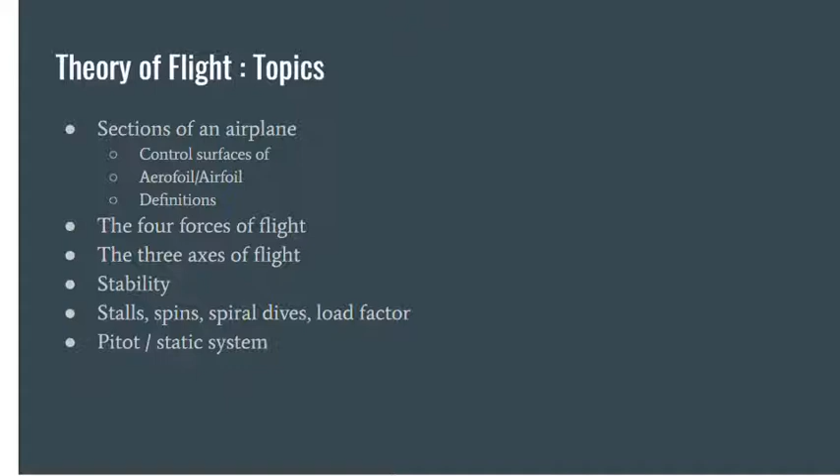So aeroplane is a power driven, heavier than air aircraft deriving its lift in flight from aerodynamic reactions on surfaces that remain fixed under given conditions of flight. So ang ikaduha is aircraft. So any machine that is capable of deriving support in the atmosphere from reactions with the air.

So inote lang ninyo nga ang aeroplane is an aircraft, but an aircraft is not always an aeroplane. Then other aircraft, so airship, helicopter, balloon, glider, or ultralight, blimps. So aircraft pud na siya.

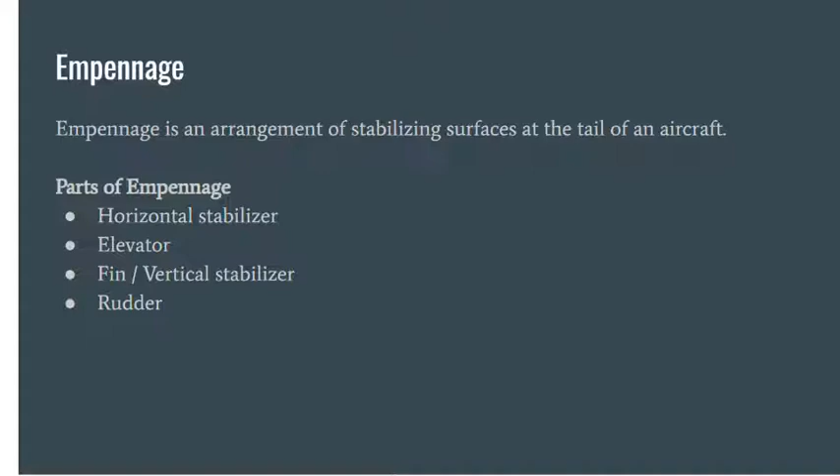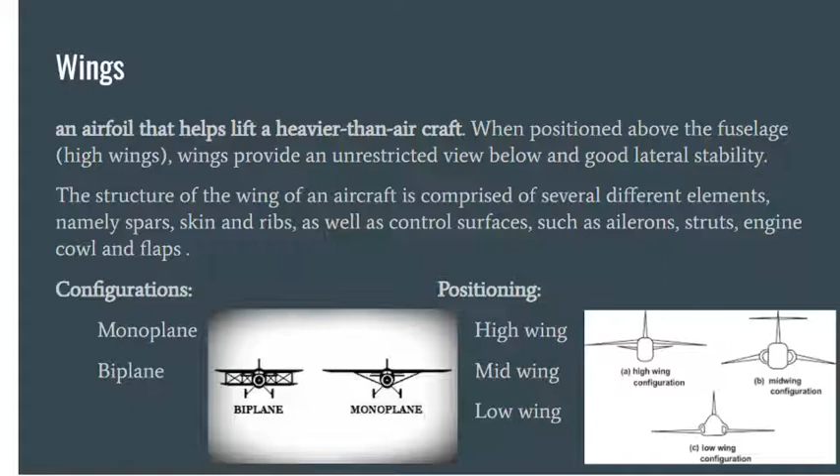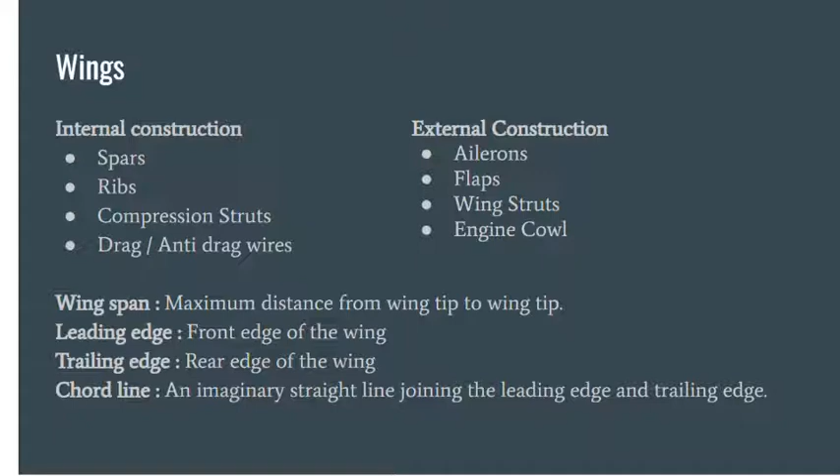Then external construction is kaning ailerons, flaps, wing struts, engine cowl. So kaning engine cowl mao ni cover sa engine ni more sa power plant. Then wingspan is maximum distance from wing tip to wing tip. Then ang leading edge kay naa siya sa front of the wing. Kung facing ka sa aeroplano or facing ka sa nose area sa aeroplano, imo makita ang iyang pinaka front sa wings, tawag ana is leading edge. Then ang trailing edge is ang nasa likod or ang rear edge of the wing. Then chord line is an imaginary straight line joining the leading edge and trailing edge.

The next, airfoil. So airfoil is a structure with curved surfaces designed to give the most favorable ratio of lift to drag in flight. Then it is used also as the basic form of the wings, fins, and horizontal stabilizer of most aircraft. So kaning airfoil, naa pod ni siya many different types of designs, each of specific purpose. Basically, aircraft designed for slow speeds will have a thick wing. Then ang thin wing is best for high speed. So nakakita ba mo jet plane? So nipis man iyang wing surfaces or iyang airfoil. So mao to, paspas kayo ni. So kanang nipis.

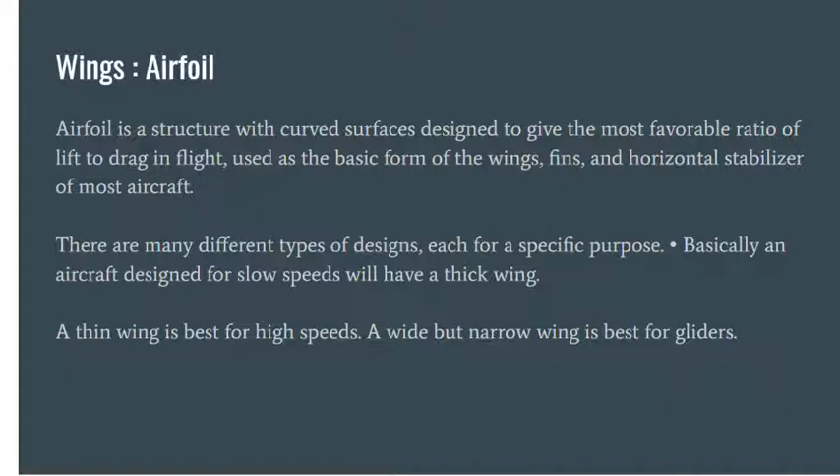Then next, so naay duha ka types of airfoil. So mao ni ang conventional and laminar flow. So sa conventional, thick iyang structure and lower weight for better stall. So characteristic ani niya. And the thickest part is at 25% sa chord. So from 25%, padung dire sa trailing edge niya. So 25% ana is mao ni thickest part niya. Then plus 25 pa ana, so ma 50% is mao lang gyapon ni ang iyahang thickest part niya. Ang pinaka last nga 25% is padung na trailing edge. So panipis na padung sa iyang trailing edge.

Dayon ang laminar flow is usually thin. So originally designed to fly faster. So the leading edge ani is more pointed and its lower and upper surfaces are nearly symmetrical. So ang thickest part ani is naa siya sa center or sa 50% nga chord.

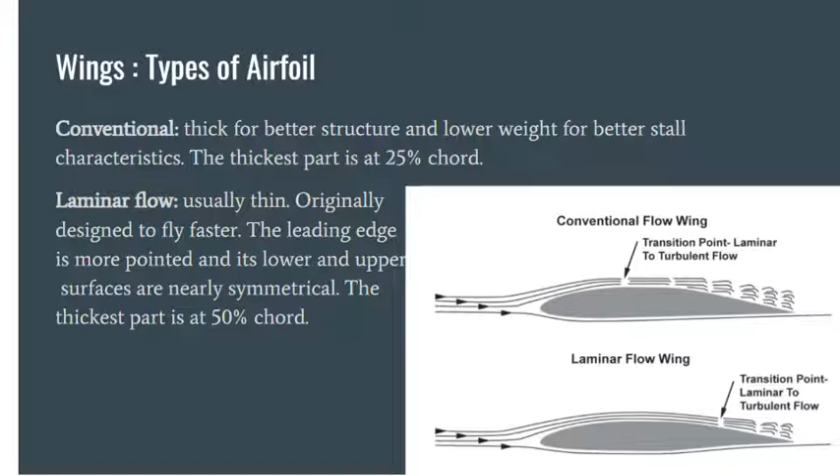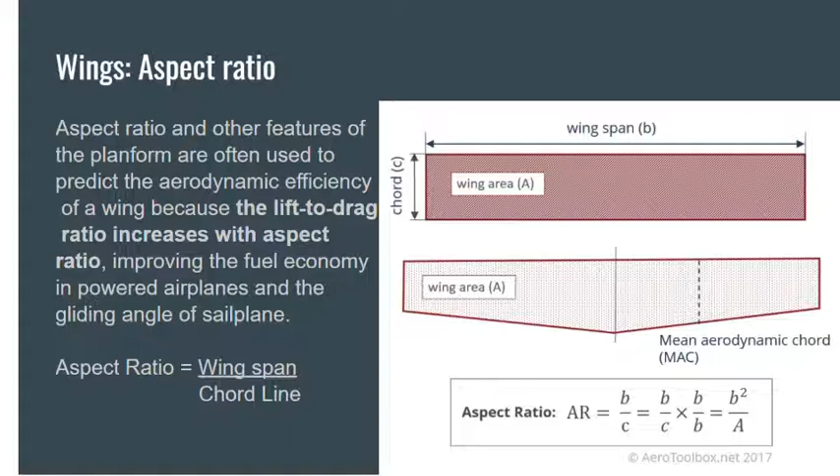Wingspan. So wingspan is the maximum extent across the wings. So mao to wingtip to wingtip. So mao nang wingspan. Then chord line, leading edge to trailing edge. So the imaginary straight line joining the leading edge and trailing edge of an airfoil.

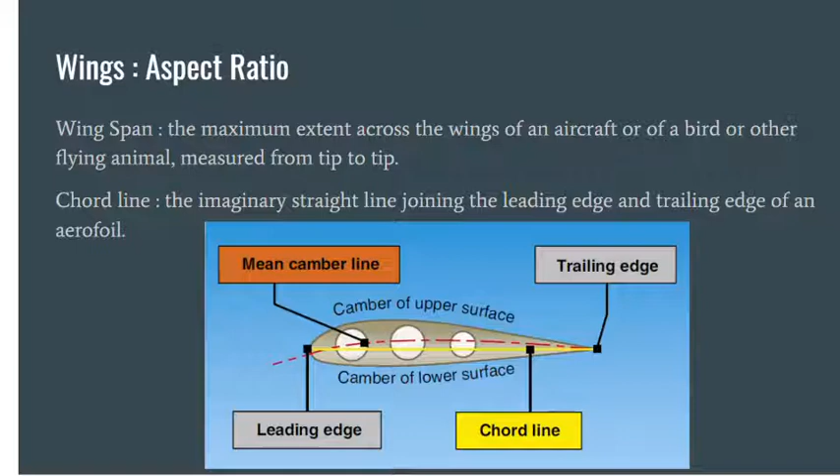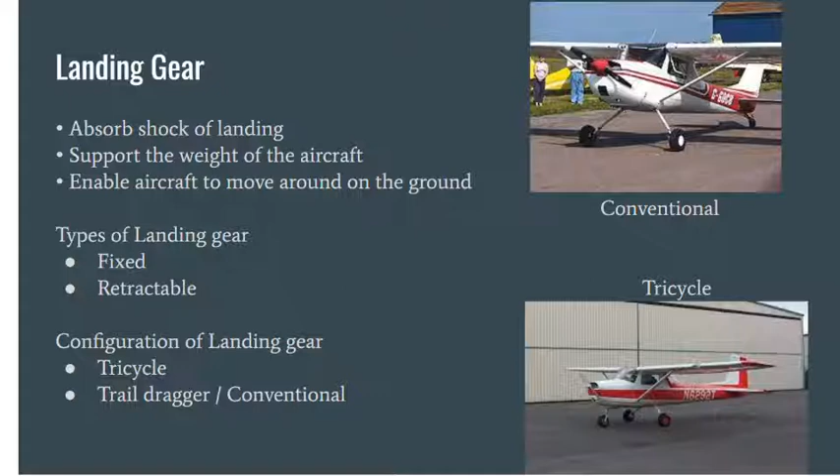Then configuration sa landing gear. So mao ni ang tricycle type and conventional or tail dragger. So as you can see sa illustration, ang conventional is duha iyang main pero nasa likod or sa tail section iyang isa ka wheel. Then sa tricycle type is nasa power plant or sa nose area iyang isa ka wheel, then duha pud sa main landing gear or sa likod ana niya.

The next, power plant or propulsion system. So sa power plant, in simple terms, an aircraft power plant is an engine. It is made up of many components such as cylinders, pistons, and fans, which help to produce the energy needed to propel an aircraft. Then the power plant may be a jet engine or combination of propellers and engine.

Additionally, there are numerous types of engines for the variety of aircraft, such as helicopters or commercial jets, commercial aircraft. Jet engines are typically one of the more common types of aircraft power plant.

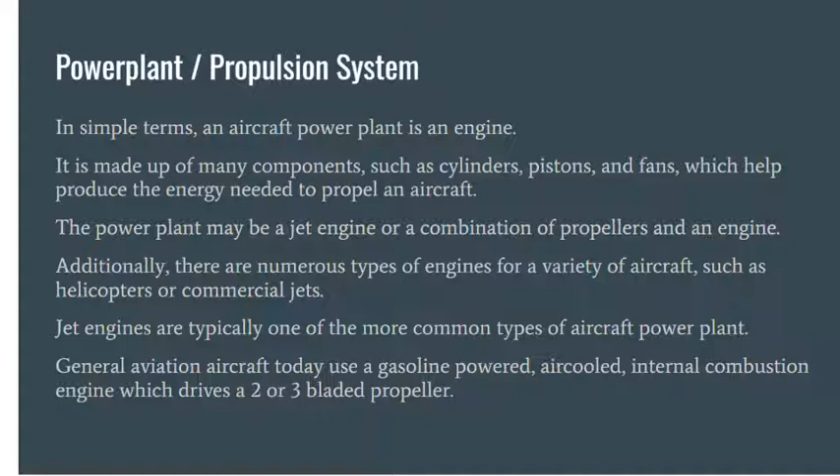Then general aviation aircraft today use gasoline. So general aviation, what they use is Beechcraft. So usually they use gasoline powered, or their fuel is called avgas, which is an air cooled internal combustion engine which drives a 2 or 3 bladed propeller.

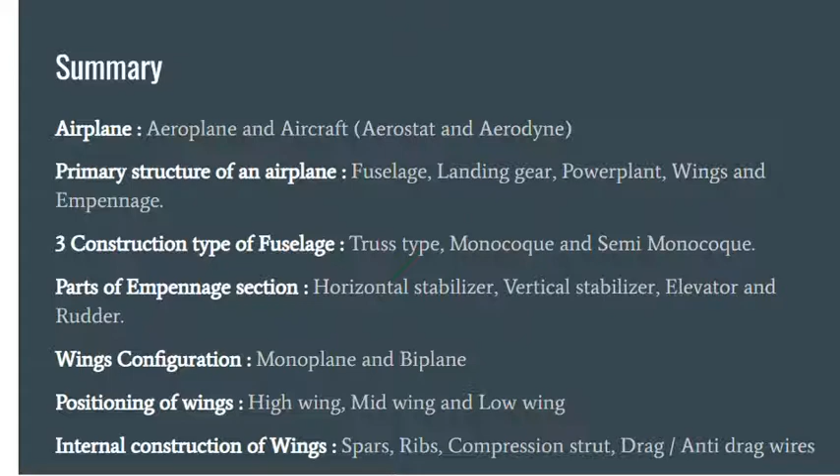Main parts: spars, ribs, compression strut, drag or anti-drag wires. Then external construction of the wings: ailerons, flaps, wing struts, and engine cowl. Then types of wing airfoil, there are two types: conventional and laminar flow. Aspect ratio is wingspan divided by the average chord line. Then types of landing gear: fixed and retractable landing gear.

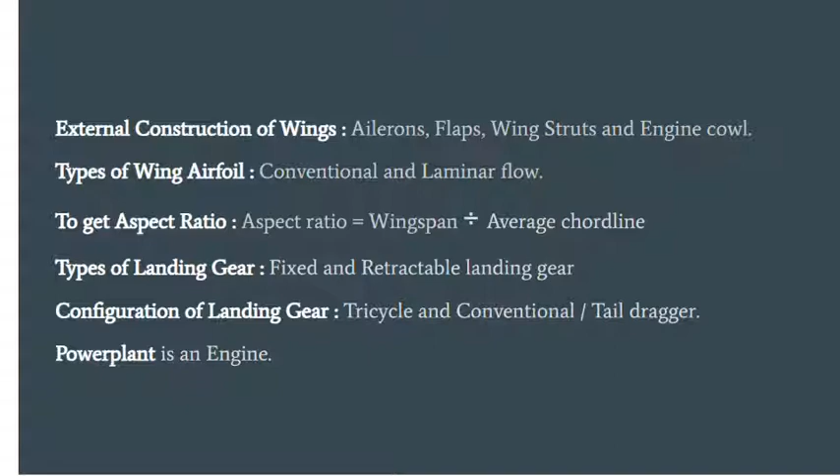Next, there are 4 forces acting on the aircraft: thrust, drag, lift, and weight. Understanding how these forces work and knowing how to control them with the use of power and flight controls are essential to flight. Thrust is the forward force produced by the power plant or propeller. It opposes or overcomes the force of drag. Drag is the rearward retarding force caused by the disruption of airflow by the wing, rotor, fuselage, or any protruding objects.

Then lift is a force produced by the dynamic effect of the air acting on the airfoil and acts perpendicular to the flight path through the center of lift and perpendicular to the lateral axis. In level flight, lift opposes the downward force, which we call weight. As you can see in the illustration.

And last is weight. Weight is the combined load of the aircraft itself, the crew, the fuel, and the cargo or baggage carried on the airplane. Weight is a force that pulls the aircraft downward because of gravity. It opposes lift and acts vertically downward through the aircraft center of gravity.

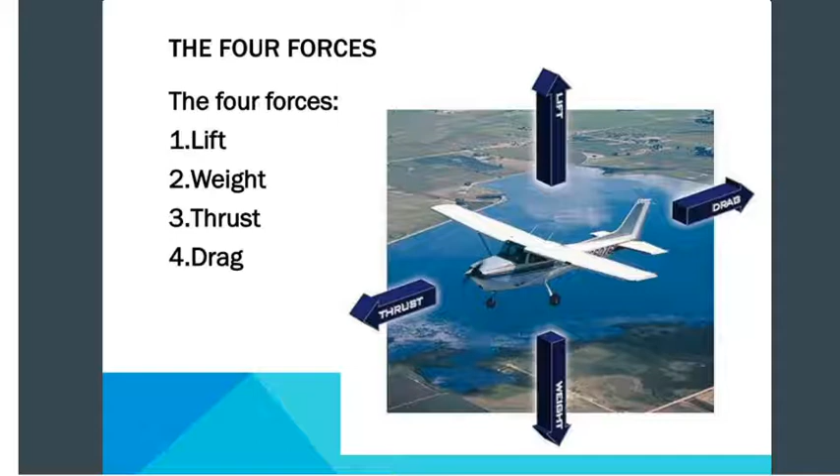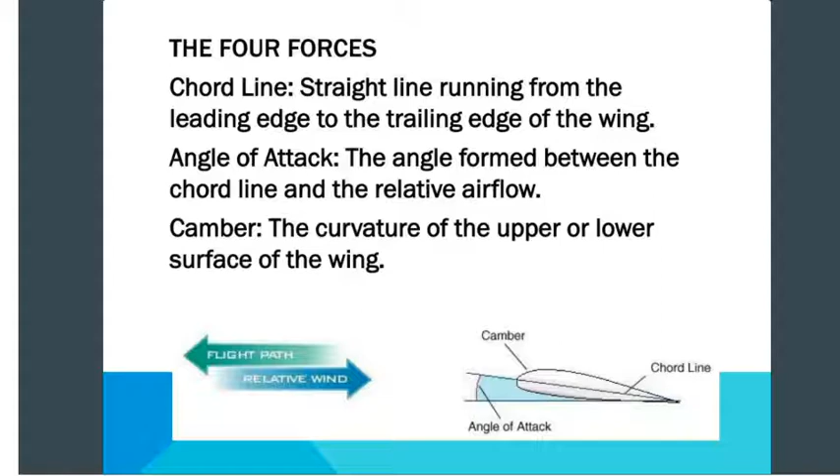Next is camber. Camber is the curvature of the upper or lower surface of the wing. In the middle of the camber is the imaginary chord line from the leading edge to the trailing edge of the wing. Next is angle of attack, which is formed between the chord line and the relative airflow.

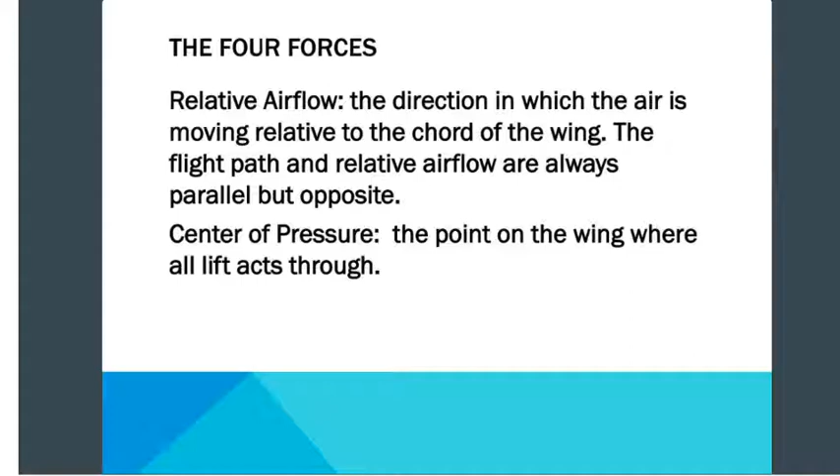Next, relative airflow. Relative airflow is the direction in which the air is moving relative to the chord of the wing. The flight path and relative airflow are always parallel but opposite. Center of pressure is the point on the wing where all lift acts through. Next, laminar airflow. This is the smooth streamlined airflow over the wing.

It is also defined as the airflow within a designated space that is uniform in both velocity and direction. So if you ride an airplane, the flight is smooth when it experiences laminar airflow.

Then turbulent airflow. This is an airflow over the wing which is no longer smooth but has become chaotic. If you've been on a commercial aircraft, you may experience this, or have heard the term turbulence, occurring mid-air.

When this turbulent airflow occurs, it feels like driving on a rough road, similar to riding in a vehicle. Then, transition point. This is the point where laminar airflow changes to turbulent airflow, for example above 10,000 feet sea level where the flight is usually smooth, then suddenly turbulence occurs, like passing through clouds, transitioning suddenly from smooth to chaotic flight experience.

Then boundary layer. This is the very thin layer of air that sticks to the wings due to skin friction. This layer of air consists of both laminar and turbulent airflow.

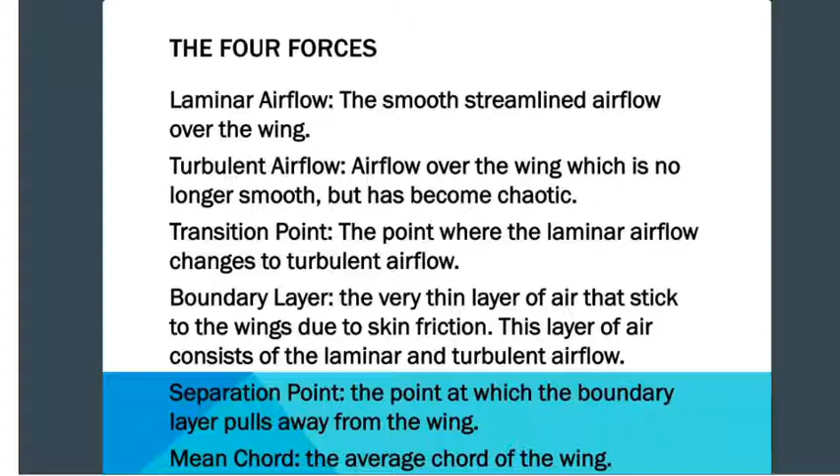Next, angle of incidence. Angle of incidence is the angle at which the wing is permanently inclined to the longitudinal axis.

Wash in, wash out is wings that are slightly twisted, causing the wing root to have a higher angle of attack.

Then spoilers and dive brakes. These devices are fitted into the wing to increase drag and decrease lift. Spoilers are on top, dive brakes are on the bottom. This is similar to a thrust reverser that you can find on a commercial aircraft.

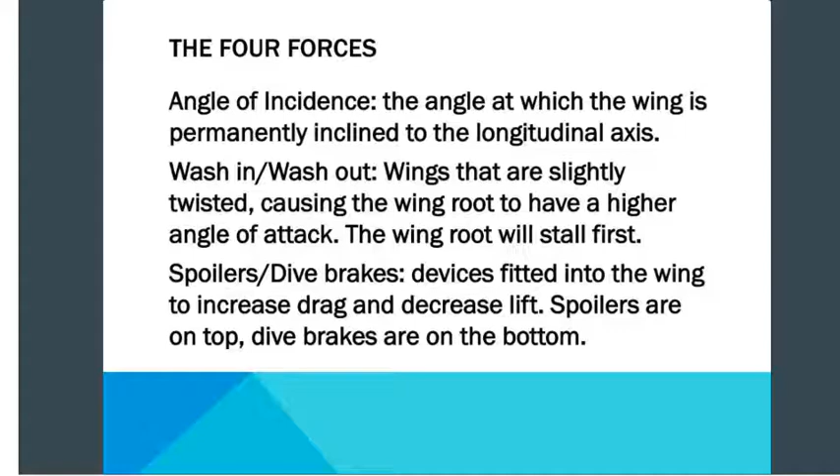Next, wing fences, fin like surfaces on the upper part of the wing to control airflow, providing better slow speed handling and stall characteristics.

Slats. Slats are auxiliary aerofoils fitted to the leading edge of the wing to improve lateral control. Slats pull out from the wing at high angles of attack, pushing the turbulent airflow farther back.

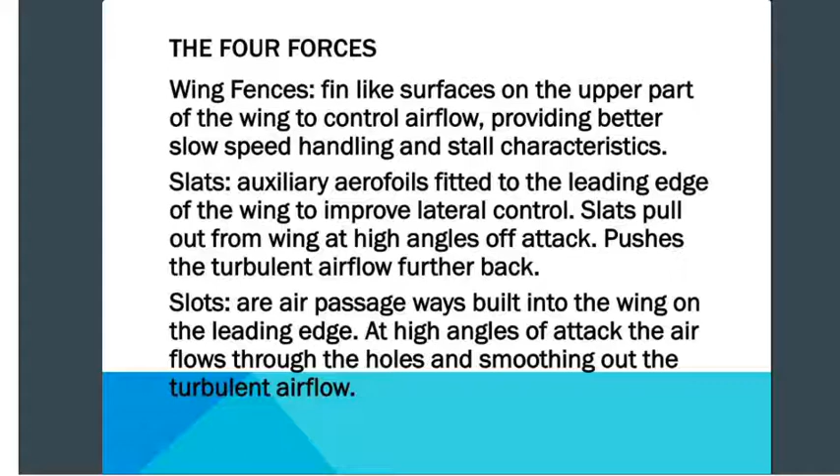Then slots are air passageways built into the wing on the leading edge. At high angles of attack, air flows through the holes, smoothing out the turbulent airflow.

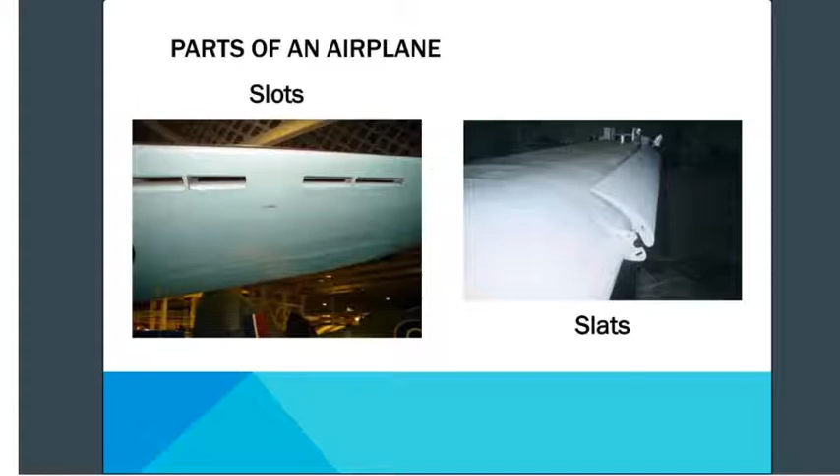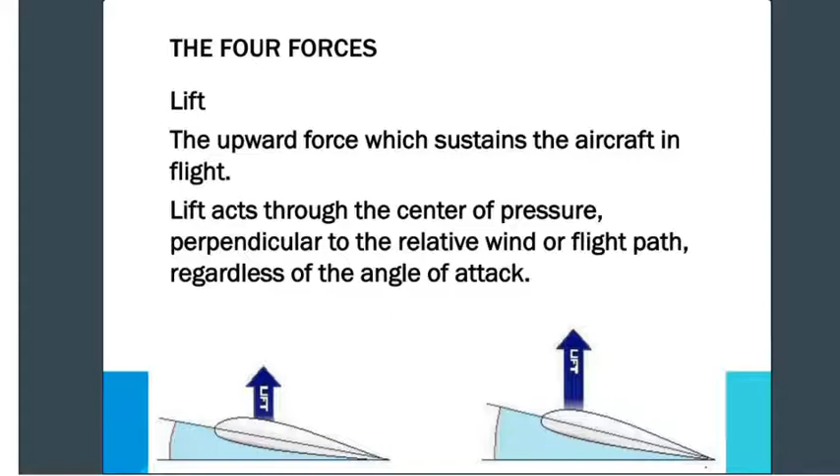Next, lift. Lift is the upward force that sustains the aircraft in flight. Lift acts through the center of pressure, perpendicular to the relative wind or flight path, regardless of the angle of attack.

Then there is lift related to Newton's three laws of motion. Number one: an object in motion tends to remain in motion. Second: an external force must be applied to alter the state of motion. And third: for every action there is an equal but opposite reaction.

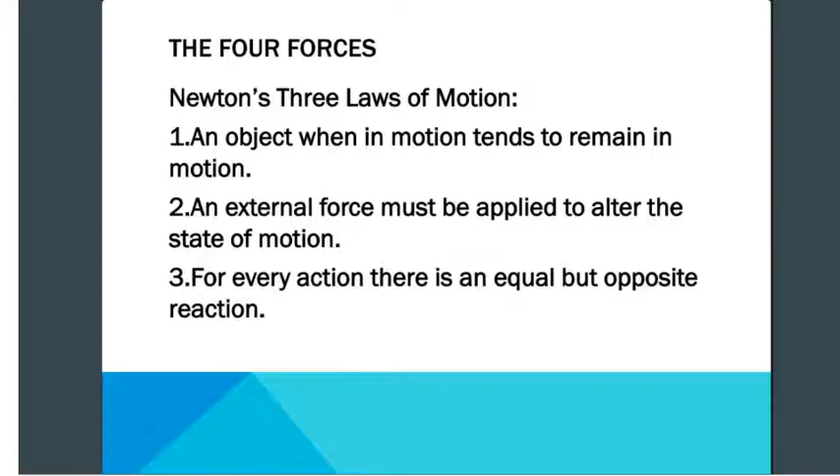Then Bernoulli's principle: the total energy in a system remains constant. If one element increases, the other element must decrease to counterbalance it.

Air flowing over the upper surface of the wing accelerates to catch up with the air flowing under the wing. As the air speeds up, the pressure decreases, and on the bottom of the wing, the pressure increases.

The differential in pressure between the upper and lower surfaces of the wing is what causes the upward force. This is what is called lift.

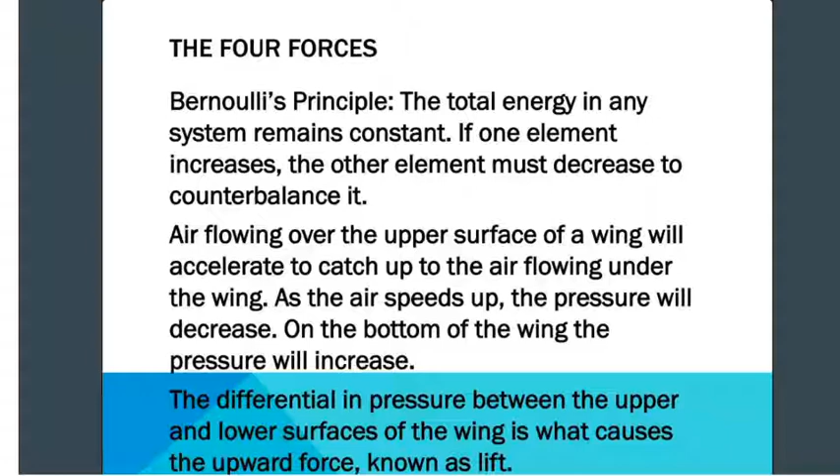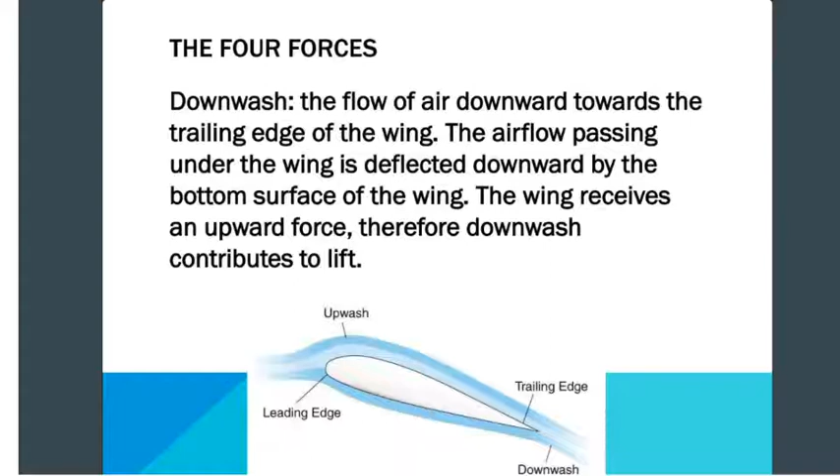Next, downwash. Downwash is the flow of air downward towards the trailing edge of the wing. The airflow passing under the wing is deflected downward by the bottom surface of the wing, so the wing receives an upward force. Therefore, downwash contributes to lift.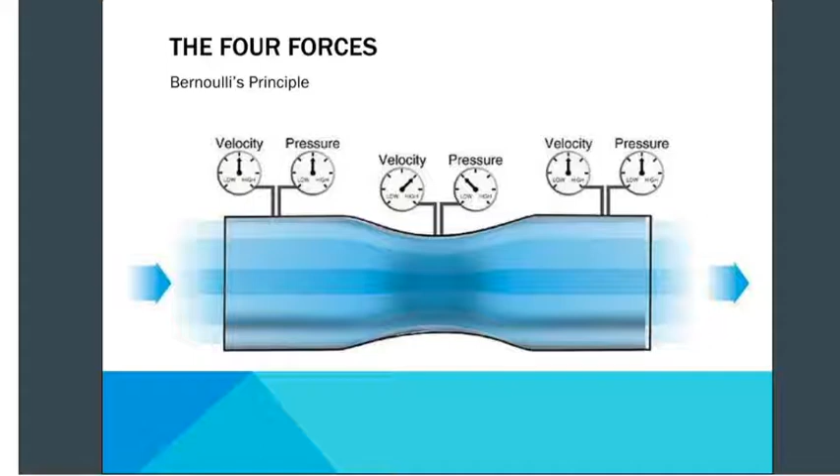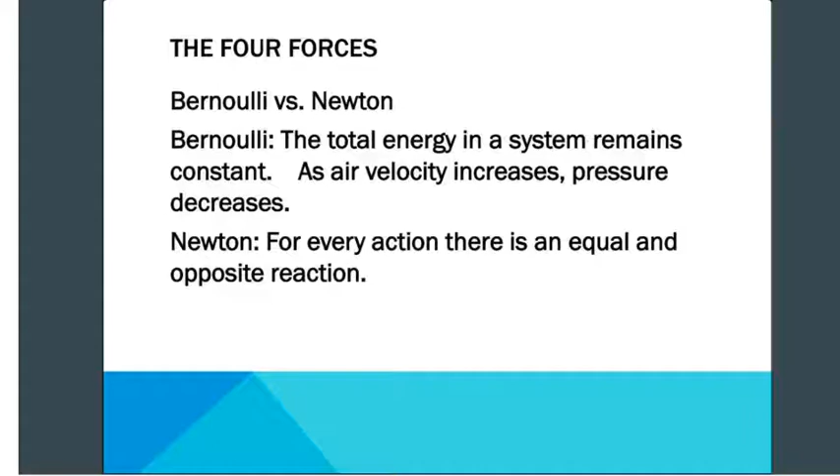Next is Bernoulli versus Newton's law of motion. In Bernoulli's principle, the total energy in a system remains constant; as air velocity increases, pressure decreases. In Newton's, it's mainly the third law that applies, though the first and second still apply too: for every action there is an equal and opposite reaction.

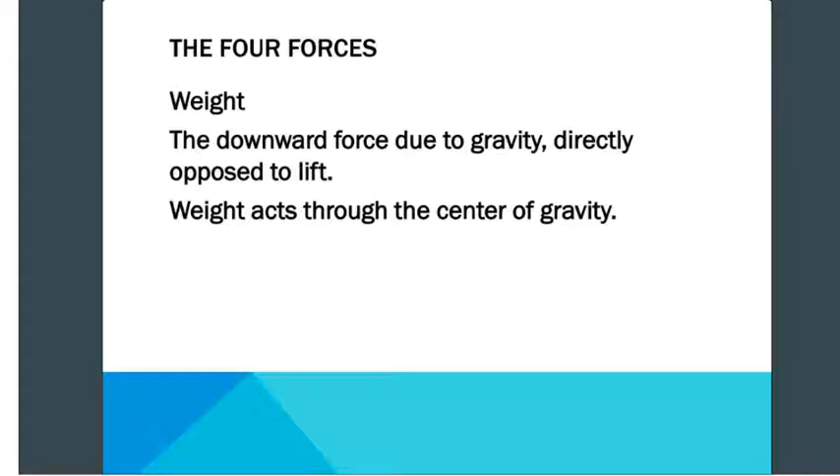Next, weight. Weight is the downward force due to gravity, directly opposing lift. Weight acts through the center of gravity. Next, thrust. Thrust is the force produced by the propeller.

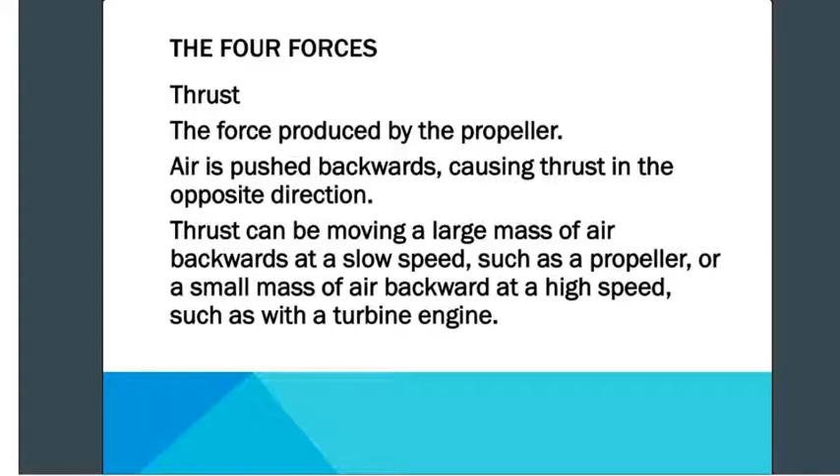In thrust, air is pushed backwards, causing thrust in the opposite direction. Thrust can be moving a large mass of air backwards at slow speed, such as a propeller, or a small mass of air backward at high speed, such as in a commercial airplane, like a turbine engine aircraft.

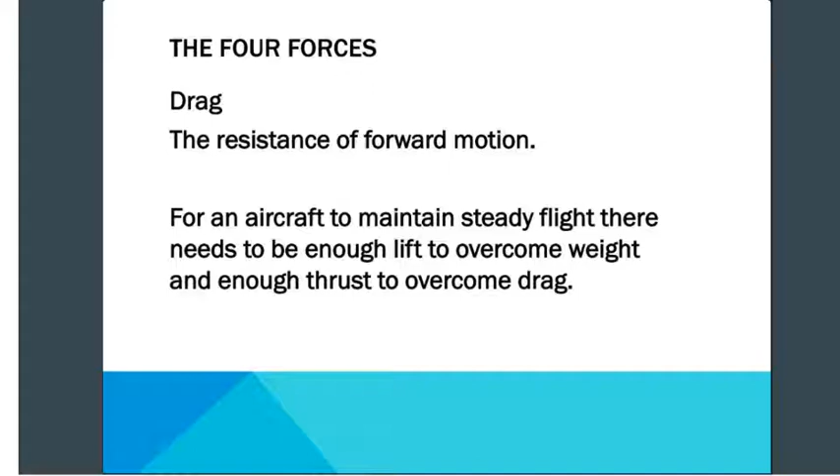The next is drag. Drag is the resistance of forward motion. So for an aircraft to maintain steady flight, there needs to be enough lift to overcome weight and enough thrust to overcome drag. For total aircraft drag, there are two major types that cause drag.

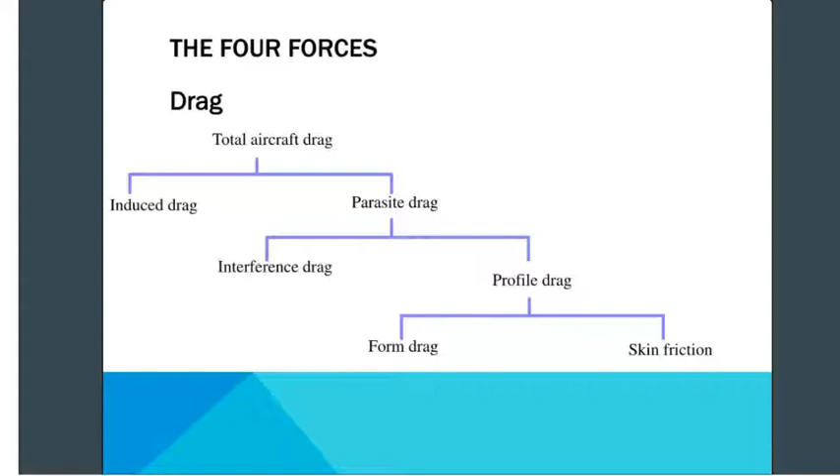This is parasite drag and induced drag. Parasite drag can be broken down into two types, which is interference drag and profile drag. And under profile drag, this can be categorized into two types, which is form drag and skin friction. In the next slide, we can see their meanings.

So next, total drag. This total drag is the resistance of forward motion of an aircraft that it experiences when moving through the air. This has two major types, which is induced drag and parasite drag.

Induced drag is a drag caused by the parts of the aircraft which contribute to lift. Examples of this are the wing, and in the tail area, the elevator.

Parasite drag is a drag caused by the parts of the aircraft which do not contribute to lift. An example of parasite drag is the aircraft shape itself, so the construction type and material used. For instance, an airplane with a rough surface creates more parasite drag than one with a smooth surface.

So parasite drag can be broken down into two types of drag, which is interference drag and profile drag. But before that, let's go to induced drag.

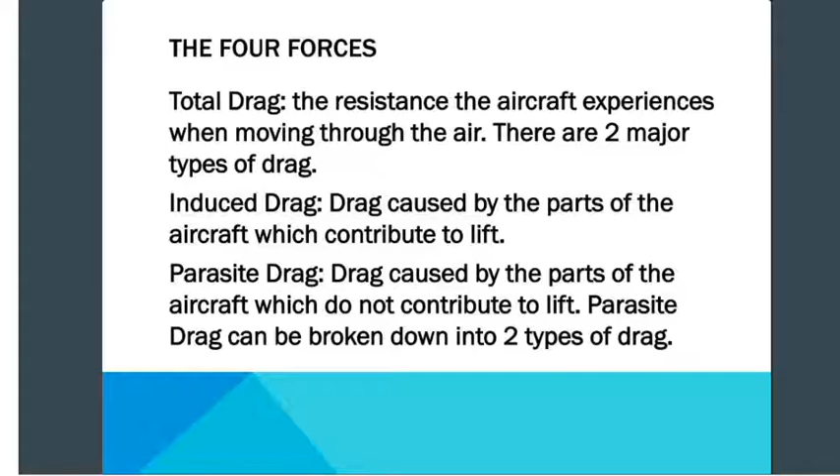Next, induced drag. The higher pressure on the lower surface of the wing will cause the air to flow outwards. Then the lower pressure on the upper surface will cause the air to flow inwards. Nature needs balance, so higher pressure air will flow to areas of low pressure to equalize, to counterbalance. Then airflow moving outwards from the bottom of the wing will curl up over the wingtip. So this drag is commonly called wingtip vortices.

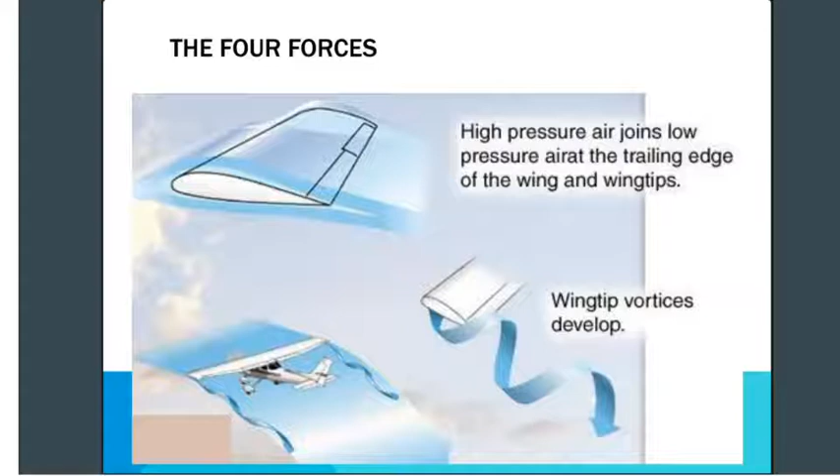So next, two types of parasite drag. Interference drag - this is a drag caused by joining two or more parts.

So for example, look at where the fuselage and wing meet. Interference drag forms behind the trailing edge of the wing adjacent to the fuselage. The solution for this is to streamline the parts, or contour the aircraft body, round it out to reduce the drag.

Then for profile drag, this is a parasite drag which is further broken down into two types. Form drag is a profile drag which is drag caused by the shape of the aircraft. Then skin friction is a profile drag caused by the tendency of air flowing over the surface to stick to it.

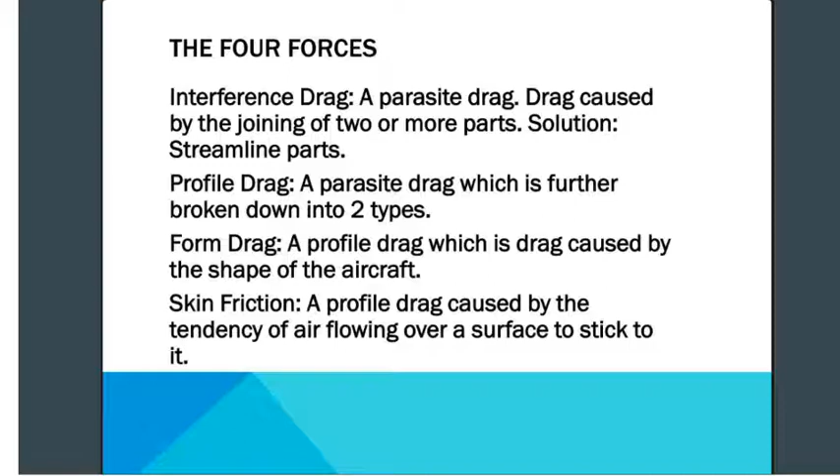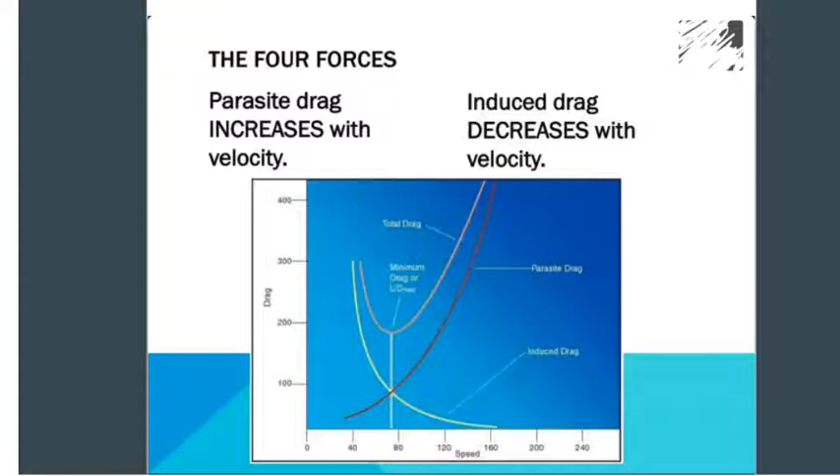Then in order to reduce the parasite drag, the form to take is streamlining, then reduce the frontal area of the aircraft. So it's better if radial engines are used so that the nose area stays more rounded.

Then the landing gear should be retractable so it has less drag. Then for skin friction, clean the aircraft, or clean the skin surfaces of the wing of the aircraft. If ice has accumulated, remove it, or if there's dirt, remove it, clean it properly, then apply wax.

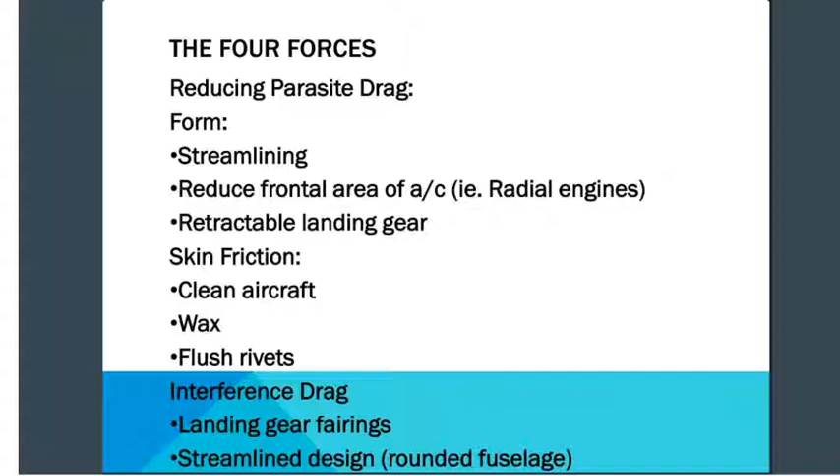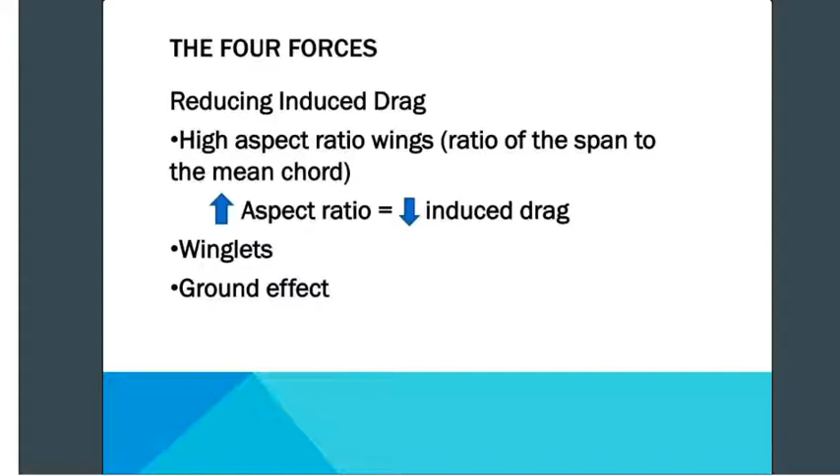Then next, reducing induced drag: use high aspect ratio wings. The higher the aspect ratio, the less the induced drag. You can also add winglets, and there's also ground effect.

There are 3 dimensions of force, this is the 3-dimensional force on an aircraft. So this includes moments, couple, and equilibrium. But I didn't include moments since couples and equilibrium are the ones that stand out more.

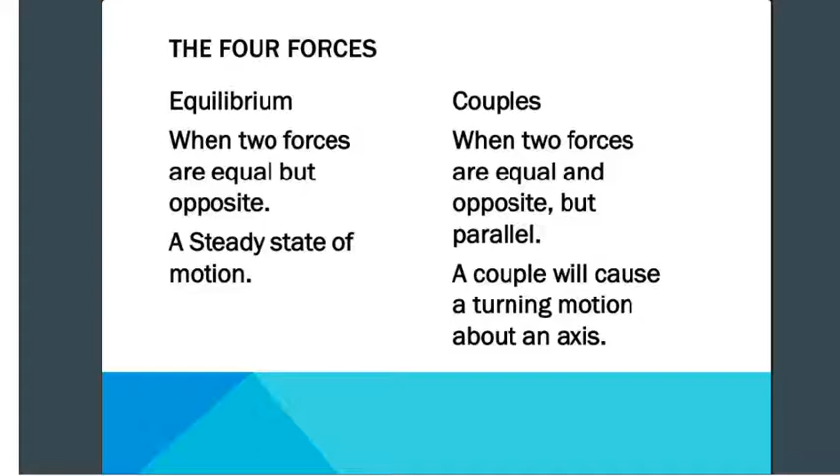Couples: when two forces are equal and opposite but parallel. A couple will cause a turning motion about an axis. Equilibrium: when two forces are equal but opposite, meaning a steady state of motion. For example, in thrust and drag, if both are equal but opposite, they will be in a state of equilibrium.

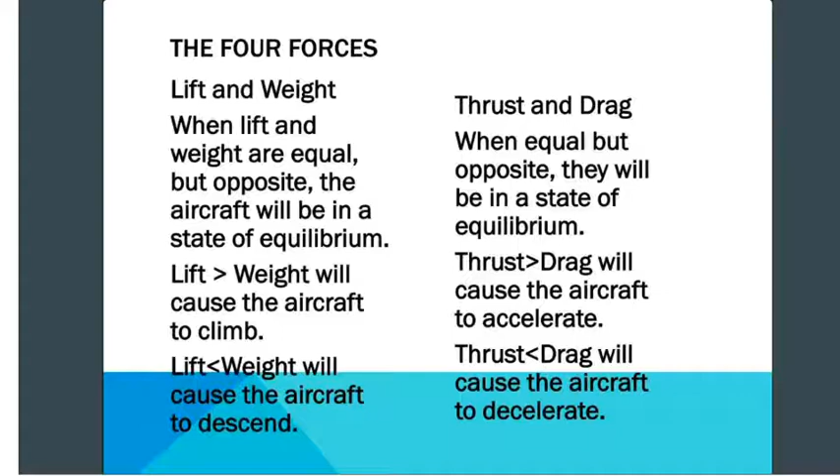If thrust is greater than drag, it will cause the aircraft to accelerate. But if thrust is less than drag, it will cause the aircraft to decelerate. Then for lift and weight, when they are equal but opposite, the aircraft will be in equilibrium. If lift is greater than weight, it will cause the aircraft to climb.

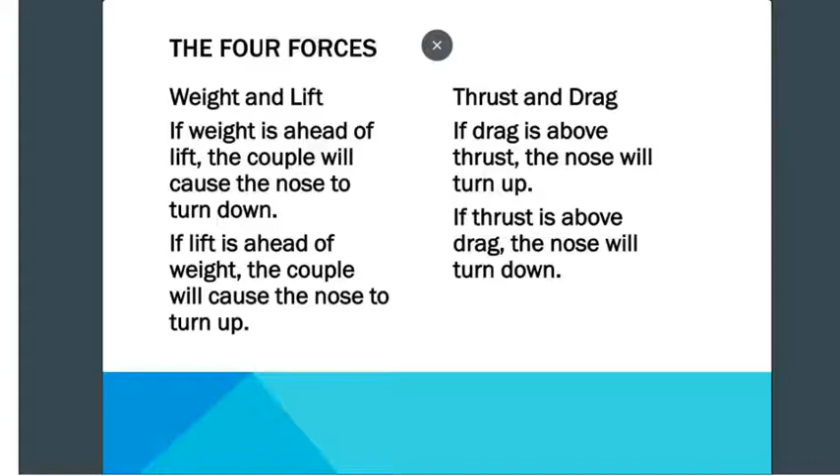But if lift is less than weight, it will cause the aircraft to descend. For example, in couples, regarding thrust and drag, if drag is above thrust, the nose will turn up. But if thrust is above drag, the nose will turn down. Then for weight and lift, if weight is ahead of lift, the couple will cause the nose to turn down. But if lift is ahead of weight, the couple will cause the nose to turn up.

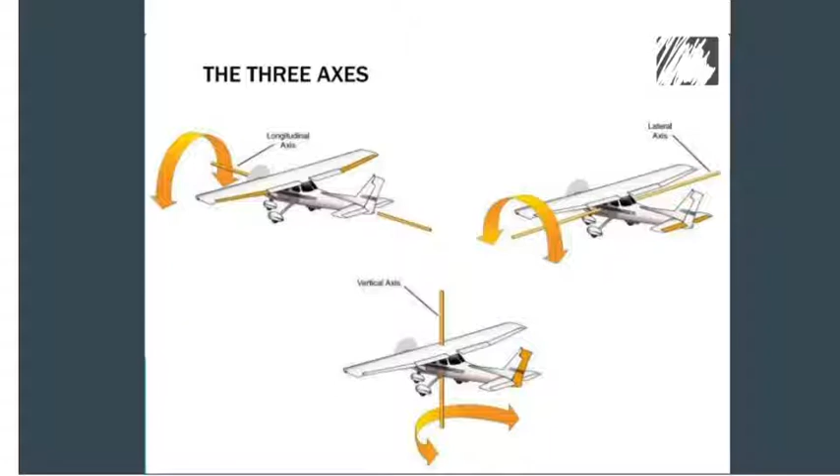Next, regardless of the type of aircraft, there are 3 axes upon which it can move: left and right, forwards and backwards, and up and down. In aviation, there are technical names for these: the lateral axis, longitudinal axis, and vertical axis. Refer to the table or illustration on this slide.

For the longitudinal axis, the movement is roll. The surface that controls this motion is the aileron, located in the wing area. The control input you manually do in the cabin is the stick or wheel control, which you turn to the left or to the right.

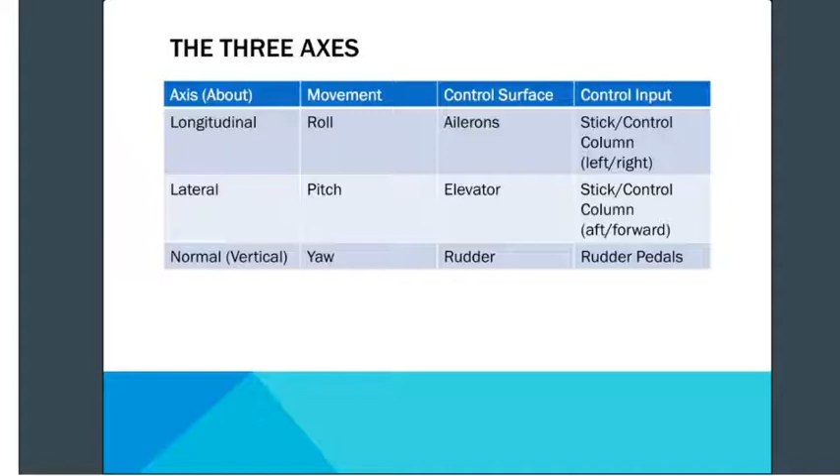Then for the lateral axis, the movement is pitch, controlled by the elevator located in the tail section of the aircraft. The control input you manually do in the cabin is the stick or wheel control, which you pull or push, or move backward or forward. Then for the vertical axis, the movement is yaw, controlled by the rudder located at the back of the vertical stabilizer. The control input you manually do in the cabin is the rudder pedals. There are two pedals, left and right, per seat.

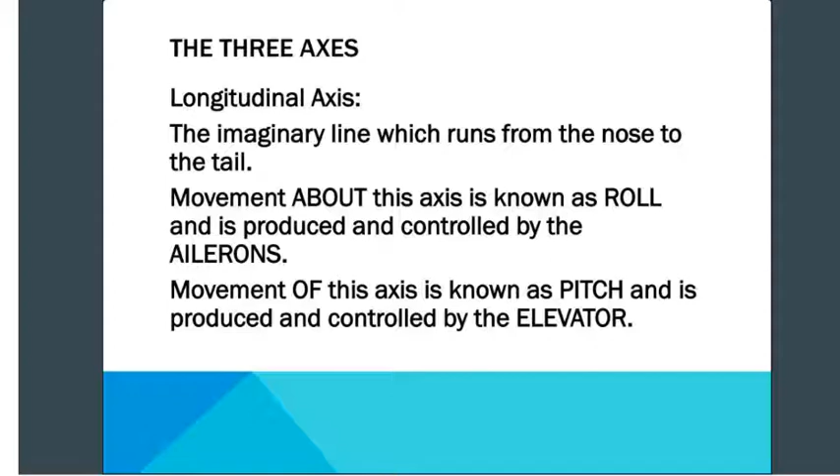Next, the longitudinal axis is the imaginary line which runs from the nose to the tail. Movement about this axis is known as roll, produced and controlled by the ailerons. To counterbalance this longitudinal axis, the movement is known as pitch, produced and controlled by the elevator.

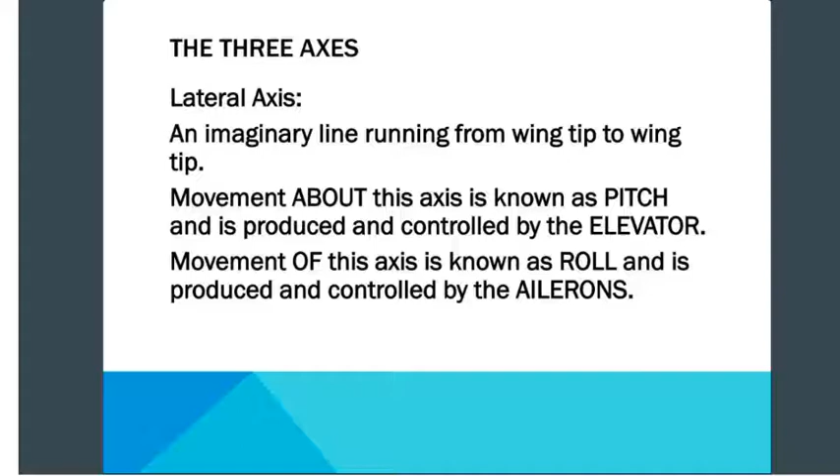Then the lateral axis is an imaginary line running from wingtip to wingtip. Movement about this axis is known as pitch, produced and controlled by the elevator. To counterbalance this lateral axis, the movement is known as roll, produced and controlled by the ailerons.

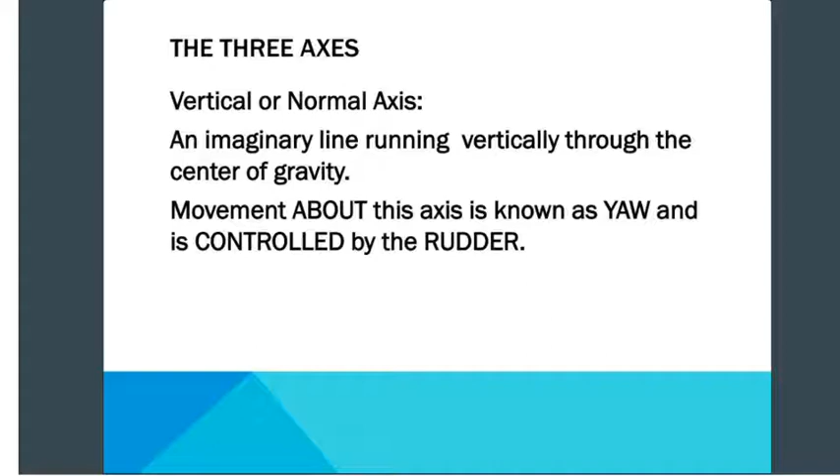Then the vertical axis, or normal axis, is an imaginary line running vertically through the center of gravity. Movement about this axis is known as yaw, and it is controlled by the rudder.

Then movements and attitude: movements are related to the aircraft, and attitudes are related to the horizon. Movements are produced and controlled by the controls to achieve an attitude.